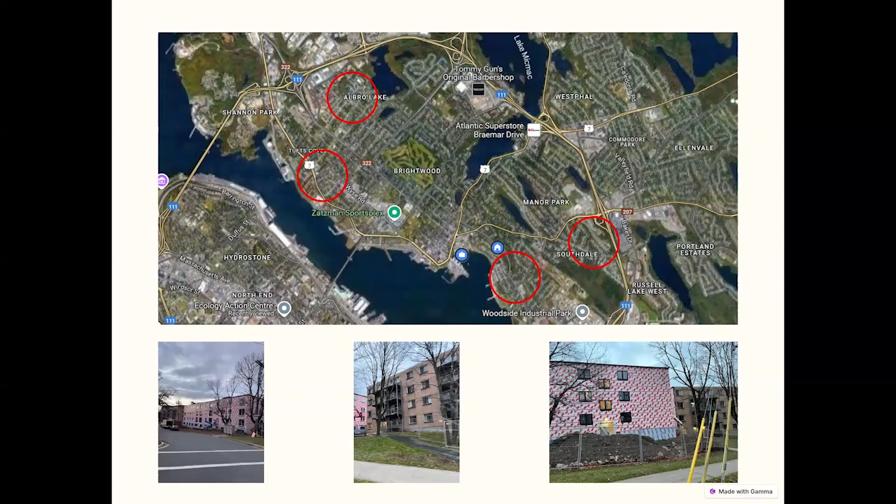This building, it's also an apartment building, rental building, is being reclad, and it's been in the process of being reclad for the last at least 7 months. And so I bring this up as an example of the case for panelization, because the tenants have been in place the entire time. This is my neighborhood, so I walk past all the time, and I've seen the construction evolve.

However, if we had taken the approach, and this is not a project that I'm involved in, I'm just in the neighborhood, if it had taken a panelized approach, one, we probably would not have been into the winter in terms of schedule, because the schedule would have been expedited. And 2, the duration, the length of time that it has taken to complete demo. Then they took the demo all the way back to the sheathing, the exterior sheathing, which they replaced.

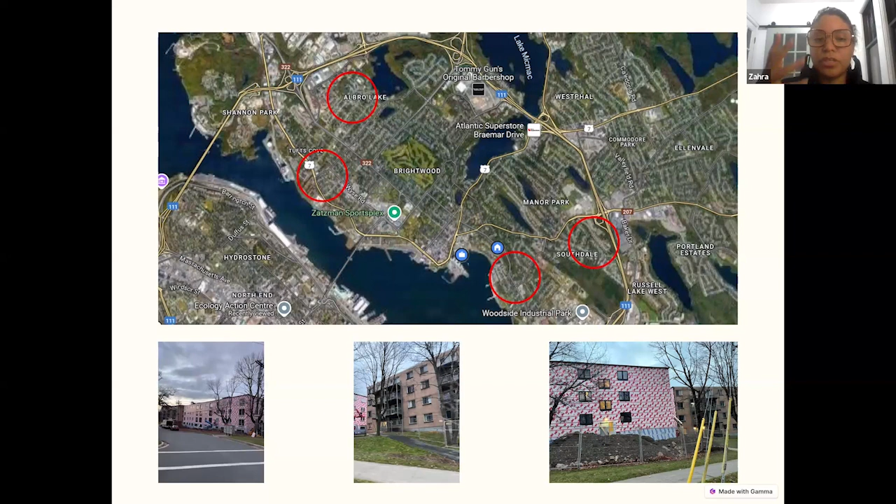They're in the process of replacing the windows, and you can see they had existing aluminum, and now they've got what seems to be, I believe, black vinyl, but I'm not sure. I didn't go close up to it, but based on the frame thickness, I'm assuming. I think they're Coltec windows. And currently, the control layer has been exposed for quite a long time. And so these are some of the interesting things that are happening when we go alternate routes.

So part of our study was to take the existing wall section of the building and imagine what that could look like. And so we did that by taking a look at a couple different panelized systems. We looked at concrete sandwich panels, and I will say in a situation like that, just based on the weight alone, would have been concerning. We looked at insulated metal panels, we looked at steel frame panels, and we looked at EIFS.

And I'm currently looking at a large scale project right now where EIFS has been brought up by the client. It's a large residential apartment building on the peninsula, and EIFS is an interesting material for me in our climate.

So what we decided to do was develop an illustration that could kind of speak to the conditions that would have to be addressed. So what you're seeing in the gray within the wall section is the existing, I'll say condensed, exterior wall, where we have a foundation condition. This is an idea of the floors. Again, exterior wall, the floors, exterior wall, and you can see where a window would have been, because in the situation of panelized, so overclad, we would have to extend that window buck, because in adding this new assembly to the exterior of an existing building, we're pushing out our insulation plane.

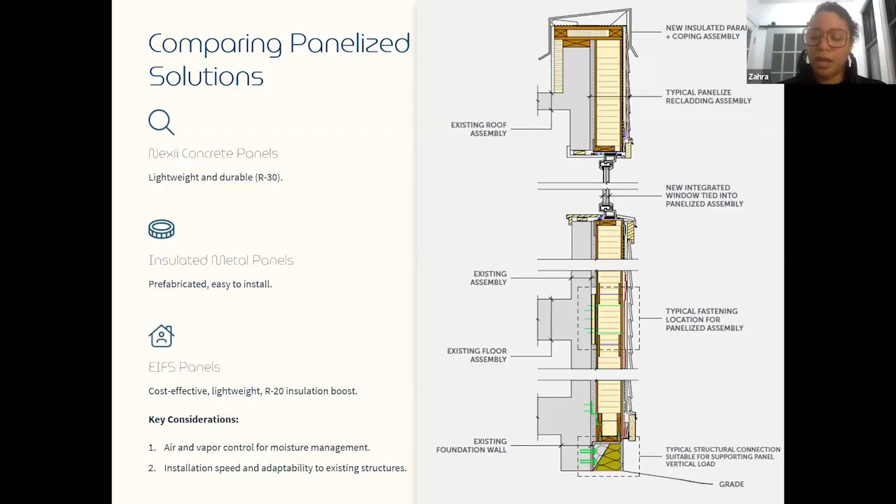But the interesting thing about this is if we are to come to site with these as panels, as opposed to what we're typically seeing in our local marketplace, which is just demoing and then essentially going around the building in phases and applying new windows, new insulation, new fasteners and new cladding, the speed by which we could essentially install panels, you could be looking at maybe, I'm just going to give an example, 20 feet wide and the floor is up maybe to 4 stories within a day, versus the amount of time that we're seeing recladdings occur right now.

So some of the things that we do need to think about as we are adding a new system onto a building that previously would not have been very tight in terms of its enclosure. People often talk about buildings breathing. There's pros and cons to the term, but the idea is that with this older building stock, and you don't even have to go that far, right? Like within my lifetime, buildings, the enclosure was not as tight, and airflow and moisture is coming in and out the enclosure. The critical thing being that when you have the ability for air and moisture to pass through and dry out, it is not an issue.

It is in tightening the envelope and trapping moisture in that we have major concerns. So moisture management becomes a challenge. And we see that in all projects. A lot of the reclads that we're doing right now, we probably have about 7 in the office, and often how much we insulate and whether we're insulating on the interior. We never go interior fully anymore, but some insulation on the interior, a hybrid wall, interior, exterior, or completely to the exterior, we're constantly doing WUFI calculations and reaching out to partners to kind of verify where our dew point is in the wall.

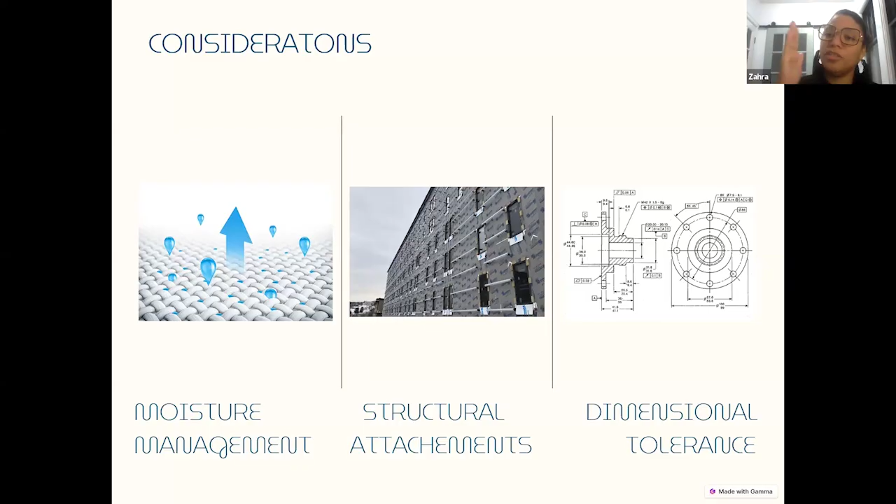There's warping happening over time. There's curvatures. These buildings are typically not rectangular in shape, and they vary both horizontally and vertically. So you're now looking at a situation where you're going to potentially fasten something that is dimensionally stable, that may not warp and change depending on the weather conditions outside, and it won't change over time, onto a substrate which is not dimensionally stable. So that is something that should be thought about, but also the tolerance of error that you have.

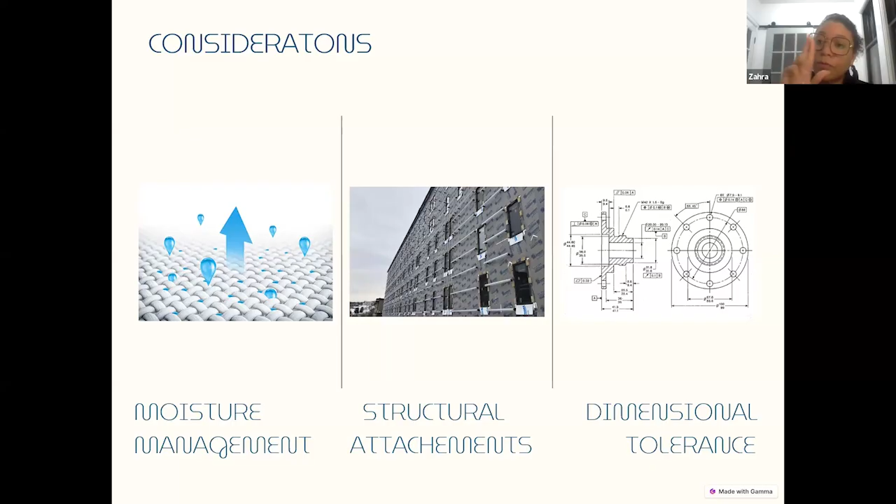Because we would always recommend a building scan, but then elements of the building are fabricated, they're coming onto site, being fastened together, and there's a point to which you can't accept any gaps or any tolerance of something not aligning, both with each other and the plane below. So those are some considerations. I'm going to pass it over to Timon.

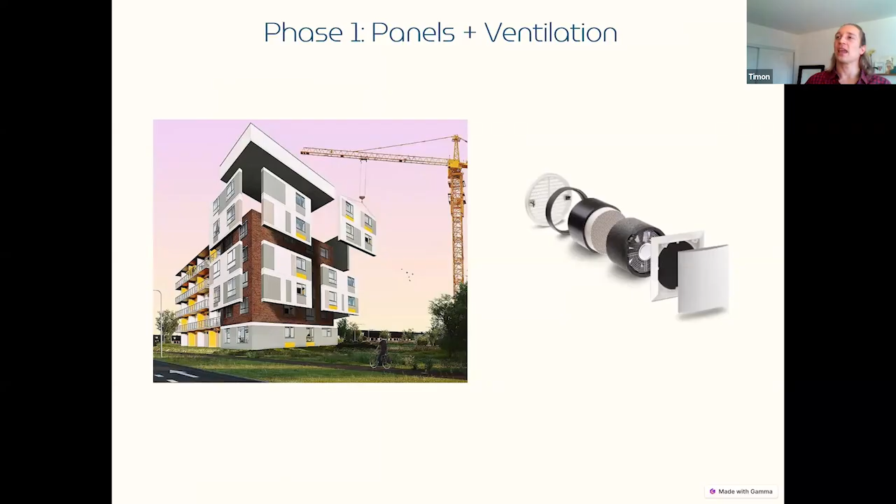And we have to add this along with our phase one, because when we solve that air leakage problem that I was talking about, we're reducing the heat load, but we're also stopping that accidental fresh air that the tenants were getting. So we want to add mechanical ventilation to replace the fresh air that was being supplied through air leakage. So the panels will address some of the heat loss, but our phase two systems will also use this opportunity to increase the mechanical efficiency. So you can go to the next slide.

So in phase two, we're looking at these mechanical systems. We can go from an existing gas boiler that is typical in a lot of buildings throughout the country, and trade this in for a central air to water heat pump. And the baseboards will be replaced with suite fan coil units. The fan coil unit takes the place of a baseboard; it just has an extra fan. And the combo of this air to water heat pump and fan coil unit will provide the heat, but they also have the addition of providing cooling to the suites where there was none before.

The central air to water heat pump also can serve for your domestic hot water. So it's taking the place of two gas boilers, one for the domestic hot water and one for the building heating. And these mechanical system upgrades are best paired with this phase one approach, because when we're adding the insulation and sealing up the building, we can actually use a lot smaller mechanical equipment. So the phase one approach can be taken by itself. You're adding insulation, you're removing the air leakage and adding new ventilation. So that can happen first, but then phase two needs to happen to a building that's already been insulated further.

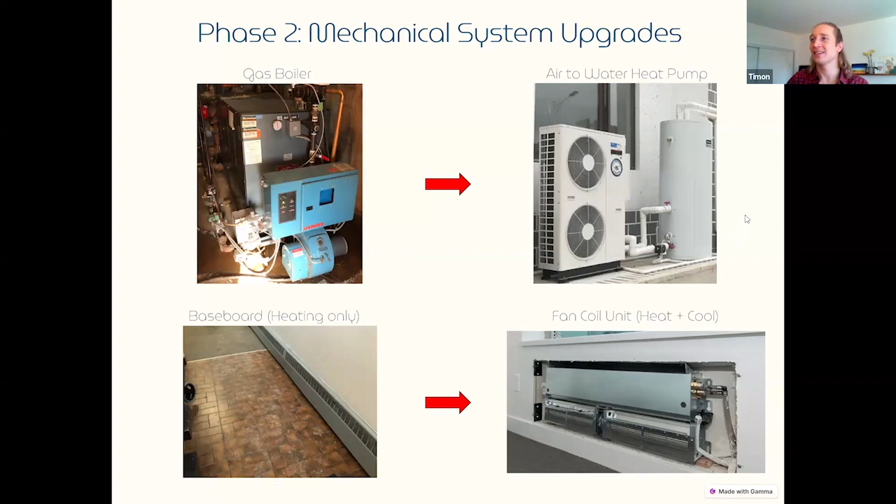Now we can move on to the results. So yeah, you can go to the next slide. Sorry, I seem to be... oh, here we go. There we go. I was having a little bit of a technical issue.

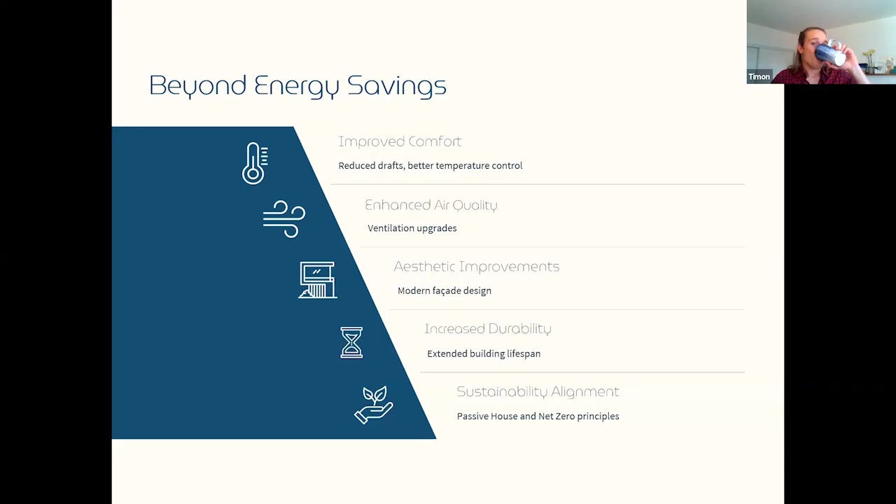Now, I think, is Hannah going to talk about this one, or are you there? Sorry, you're on mute still, but. I was gonna say, or Chris or me, I'm happy to.

So here's some of the key takeaways and really what we think is interesting, because panelization does offer a scalable solution for Nova Scotia's aging housing stock. And, you know, as we sit in a housing crisis, the other thing that it offers is a more expeditious process relative to the typical construction period to do a demolition and a reclad.

We also, of course, have significant energy and carbon savings, which are possible, but as Timon spoke earlier on, there is some work that needs to be done in our grid in order for us to really benefit from what's possible. And I think that the 2030 plan is going to help there.

But I think the other consideration and the takeaway is the benefit of pilot projects like this one. In order for the construction industry to really build confidence in this methodology, and for building owners to build confidence in this methodology, we need to be able to have projects where people can, one, see the process, but also see the benefit pre and post work being done.

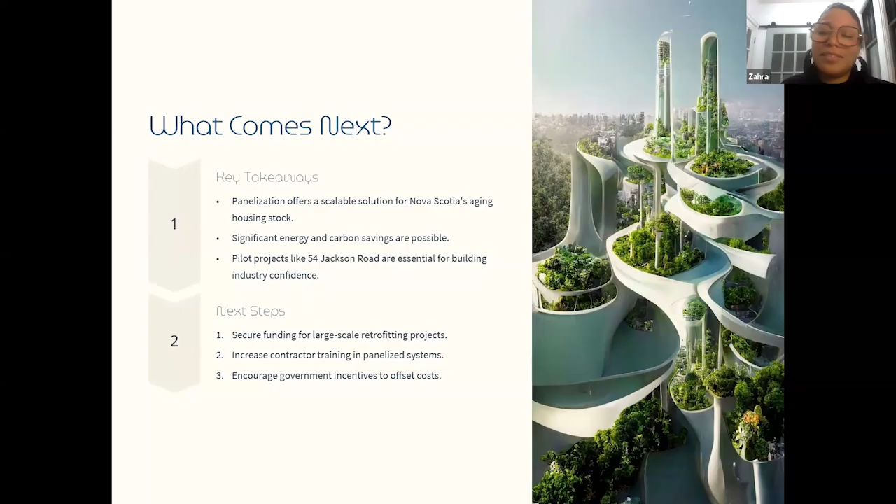And then the final thing is encouraging government incentives to offset costs. We have a major challenge with our built infrastructure in Nova Scotia. And if we are not finding ways that go beyond private dollars to make investments, our building stock will be in a similar crisis to our housing crisis. So we do need support, and support needs to come from multi-level avenues.

So I think this is our final slide, and we're curious about having conversation. We're happy to answer questions. We're curious about your thoughts on panelized retrofitting for local housing and the barriers that you foresee, either based on where you live or what you're seeing in the marketplace. And the final thing that we're curious about: are there any buildings that you think we should explore?